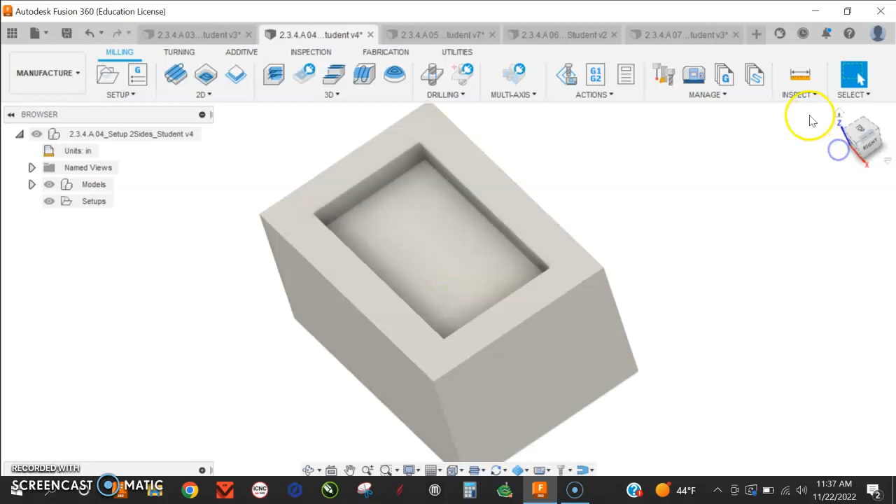So we've got the second video here. We're going to show you how to do a setup for two sides. So this block here, I've already opened it. I'm already into the Manufacture workspace. If you look at it and you click the little house, you can see that in its home isometric view there's a little pocket carved into the top.

If I flip this thing over and I look at it from the bottom, you can see there's a triangular pocket. So if I want to machine this, what I've got to do is I've got to have a setup for this side, and I've got to flip the whole thing over and have a setup for this side. So I'll show you how that works at this point.

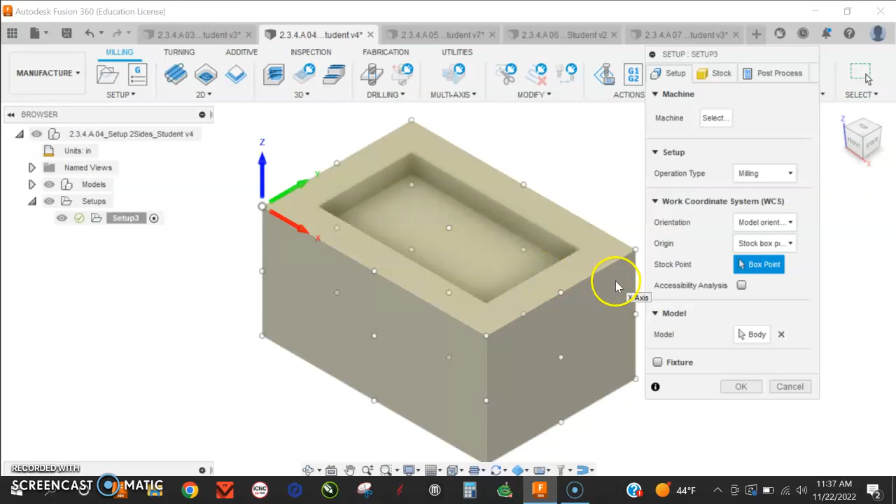I'll do a setup, make sure that my box point is located in the correct spot. My X, Y, and Z axes are all going the correct direction, and make sure that my stock is no additional stock. Okay, so there's one setup.

Now what I've got to do is I've got to flip this thing over, however you're comfortable doing it, and I'm going to do another setup. Now it's going to think I want the same deal. I don't. I want it over here, because I want this side to be facing up so my machine can access this triangular pocket.

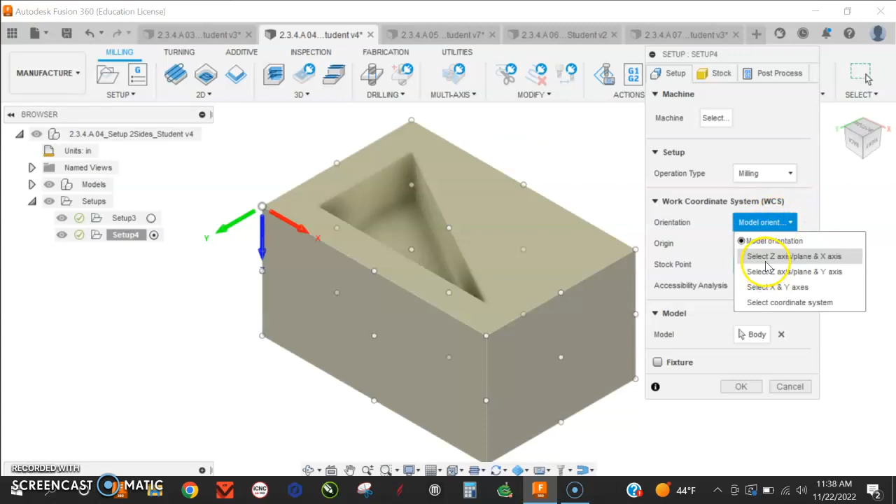Here's where I get to go and play this game with these things, where I flip my axes around. Okay. My stock is okay. This setup is alright. And I'll press OK. So what you see is setup 3 and setup 4.

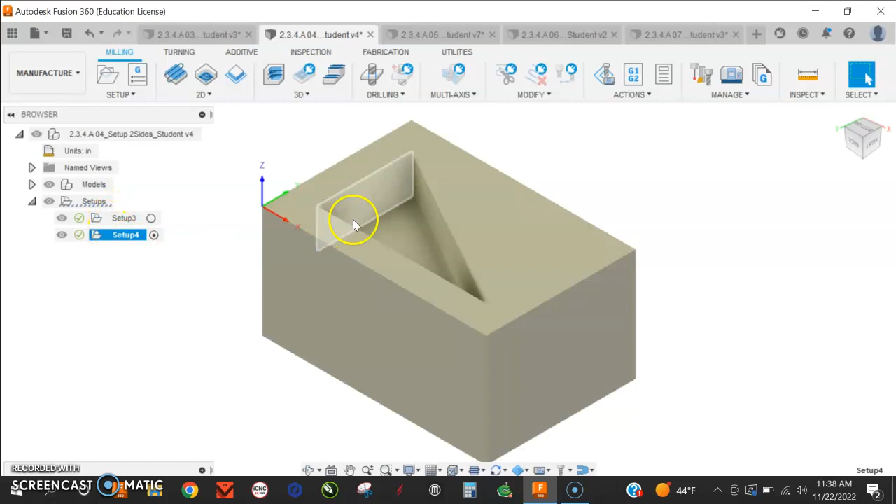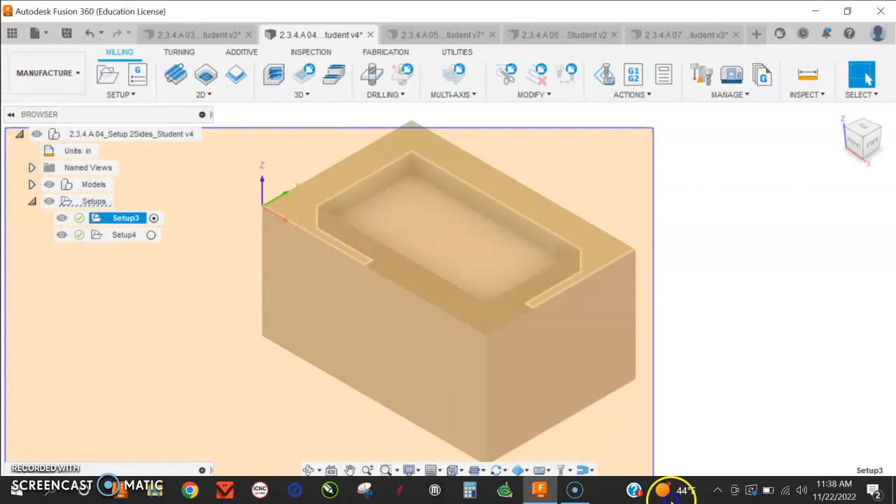I need a picture of this whole thing, and then a picture of this whole thing. Okay, push that little radio button under number 3 and 4, and you can change which setup is active. So screenshot that, screenshot this.

Also make sure you put your name on the front of this. I did not do that in this because we already went through the expectation that you put your name with a text box on the front of all of your parts. Good luck.